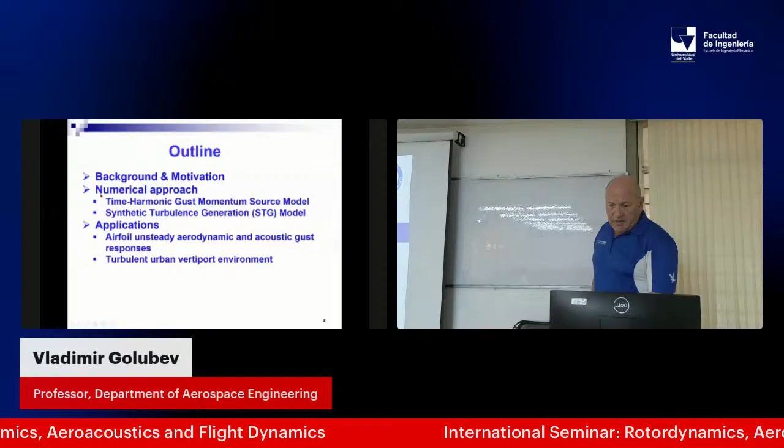So we'll talk about some applications, and first start with the formulation and motivations. We developed what's called the momentum source model.

I did all this back in 2006-07, which was the first attempt to do this for a single time harmonic.

Then in 2011, there was the first paper on the extension of this single gust to the entire turbulence, because turbulence is basically a spectrum of energy composed of modes. Each mode is basically a time harmonic gust. You assemble them in a special way to represent a specific spectrum.

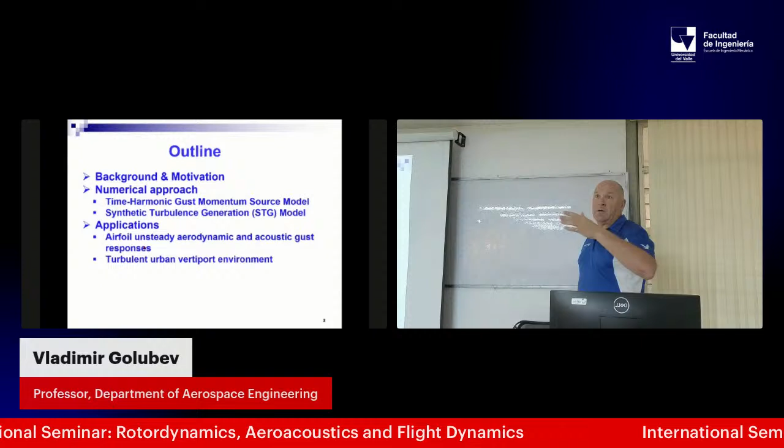Like for instance, in the atmosphere, when you look at turbulence, like in the clouds, that would typically follow some von Kármán spectrum - a specific type of energy spectrum where all the modes are distributed in a special way.

If you do turbulence in rotor-stator interactions in turbomachinery, like for instance a turbojet engine, that probably would be most useful - it would be like the Liepmann spectrum. In some other cases, the easiest one is Gaussian.

It's the easiest one because it's actually very easy to model those things. The other ones require a bit of tweaks.

This modeling process also involves some other steps which I'll talk about, broadly called random flow generation, RFG - because there's a lot of statistical data, a lot of stochastic processes involved. You will see a lot of tensors and other things like that. So that will be the challenge.

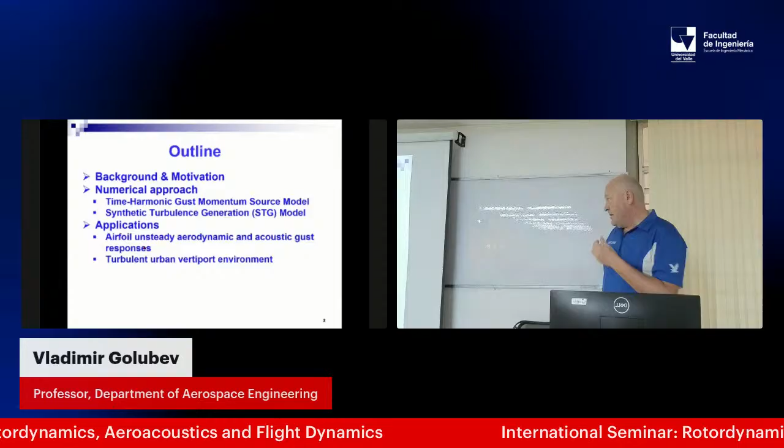But anyway, that's what it takes. Then we'll talk about applications. One application is what historically was unsteady aerodynamics and acoustics of gust responses for airfoils, wings, etc.

More recently, it's what we're doing with NASA - turbulent urban vertiport environments. That's a classical example where we apply the same methodology I developed 20, 15 years ago, to this new kind of application: eVTOLs, future air taxis.

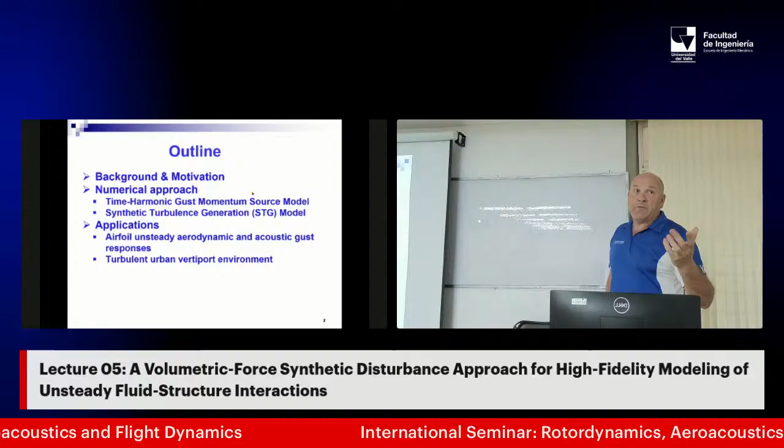So it's all basically for simulations - a methodology for high-fidelity simulations, implemented in several CFD codes, including OpenFOAM. It's now part of this, I think it's also part of GitHub, so you probably can get it from there as well.

Ask the students. Historically, again...

The urgent need for this type of source in CFD simulations came from our analysis for micro vehicles. That was part of the Air Force work which I started in 2005. We were very much interested in developing these micro vehicles and the need to analyze what the dynamics of these micro vehicles would be.

We would go to the Air Force Research Lab, and in every poll there would be displays everywhere showing this future. Just a scary future, right? So you cannot go anywhere. Everything you see, like a bird sitting on a branch, it's actually a micro vehicle, because they look exactly like that. The whole idea was to put them exactly looking like small birds, but they'll not just be watching - it actually can have a weapon inside.

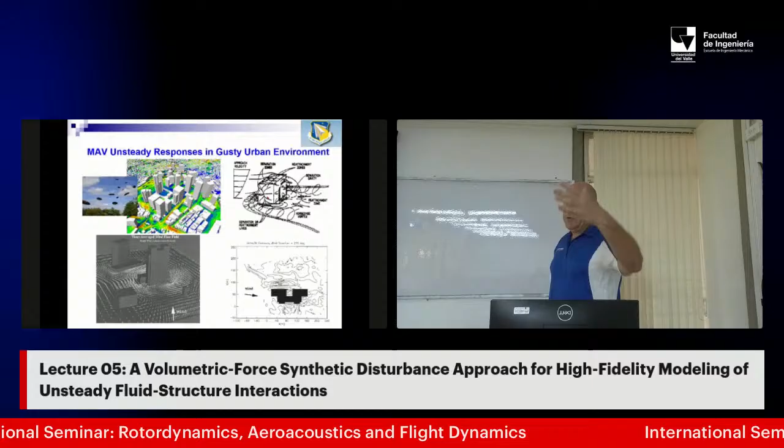A lot of research has been done on this kind of gust environment, particularly. I mentioned before, I think in Japan there was a lot of research done. They did a lot of experiments on so-called prism flows - they'll put in the wind tunnel a prism, some kind of brick, and put the flow around it, and measure all these structures which appear: cavity zone, separation zone, rotation zone, horseshoe vortices, all kinds of things.

Actually, that was historically the project which brought about this whole subject of rapid distortion theory, which I was mentioning - how the gust gets distorted due to mean flow variation, because the original work was done by the famous professor Julian Hunt, Sir Julian Hunt, from Imperial College in London. I met him - he's a very peculiar, interesting person. Talking to him is probably maybe the same as talking to Einstein or something. He's one of those geniuses - you just see it right away.

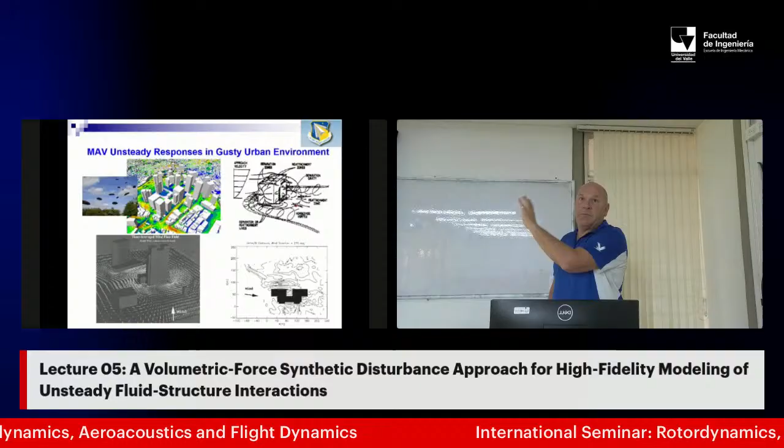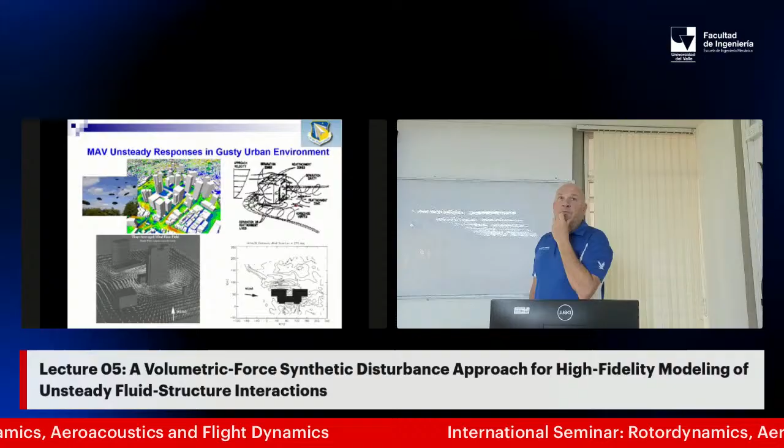Anyway, so he developed this whole theory for this kind of flows - that was the whole idea about buildings and everything. It appeared in the Journal of Industrial Aerodynamics, Wind Engineering and Industrial Aerodynamics - that's one of those journals, if you have a subscription, you have to look up, because a lot of things I'm talking about showed up there. We call it the Wind Engineering Journal. It's usually important for civil engineering, because they talk about loads on buildings due to winds, on bridges or any kind of structures. That's an important journal for them, but of course we like aerodynamics as well - so it's one of those areas where aerospace engineering and civil engineering intersect very clearly.

So for us to analyze those kinds of effects on structures like blades or wings, we usually decompose those things into canonical forms. One idea - what I was doing - you can decompose the structures into forms like time harmonic gust, sharp edge gust, Taylor vortex, particular turbulence things, etc. These are canonical forms, because later we can analyze them separately. For instance, if you decompose, I can understand what happens for the gust interaction at particular frequencies, including with that kind of decomposition with the structure, with the blade, etc. That's much easier - otherwise there would be no control. You want to create a controlled way to analyze things. That's what we actually do in NASA research - I was proposing from the beginning we need to decompose the flow fields into canonical forms, study the response to each, then assemble them back. That's the more coherent way to do this.

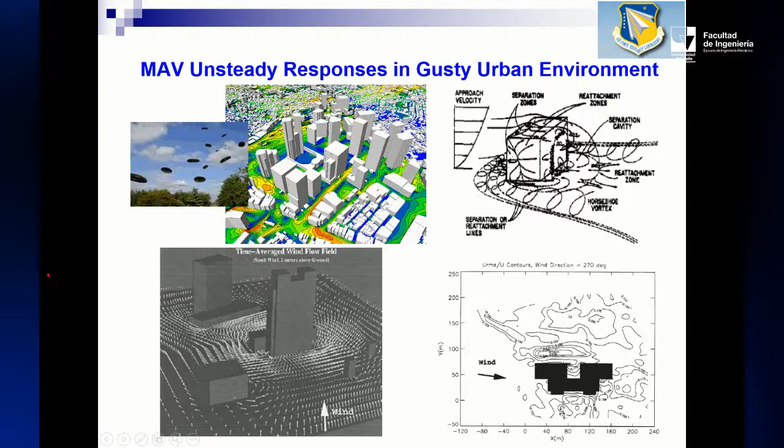And that's again an example which we were doing for this type of buildings. That's what Ali Reza, my student, is doing - going to be modeling, and I've talked about this briefly before, but I'll talk more about this thing later with this particular problem. So there's a lot of things happening here at the rooftop, and that's where these things will be landing, taking off from.

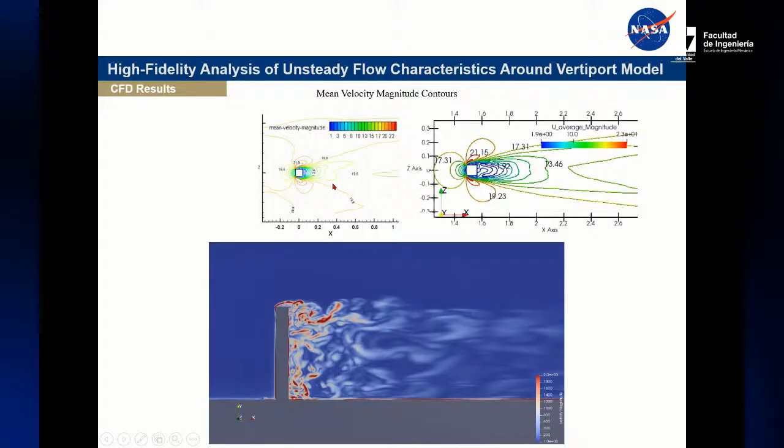Anyways, so you can pretty much build the structures using SPOD, cross-spectral decomposition. I can do FFT as well. So I'll have another presentation tomorrow where I'll talk about two various approaches. They actually should produce more or less similar results, but the SPOD sometimes is much more expensive to do these sorts of cases. So anyway, running LES CFD simulation and proceeding with the SPOD, we can look at those structures which appear in different parts of the flow around the buildings.

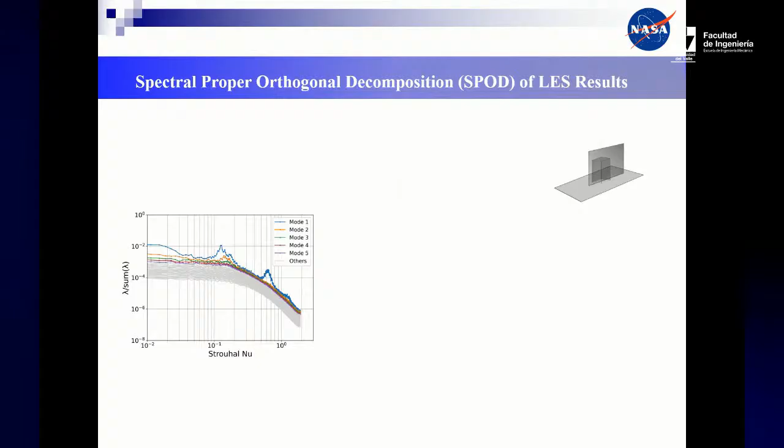And for instance, we can associate one particular spectrum with one particular structure here - should be one vortex shedding, another structure somewhere further downstream. And then this guy will get shaded with this shedding, which we'll call Kelvin-Helmholtz instability, which is due to the separation at the edge of the building. Which again produces this Kelvin-Helmholtz instability, and that shows up in terms of the structure, which is pretty much time harmonic gust. So that has specific frequencies, you can see.

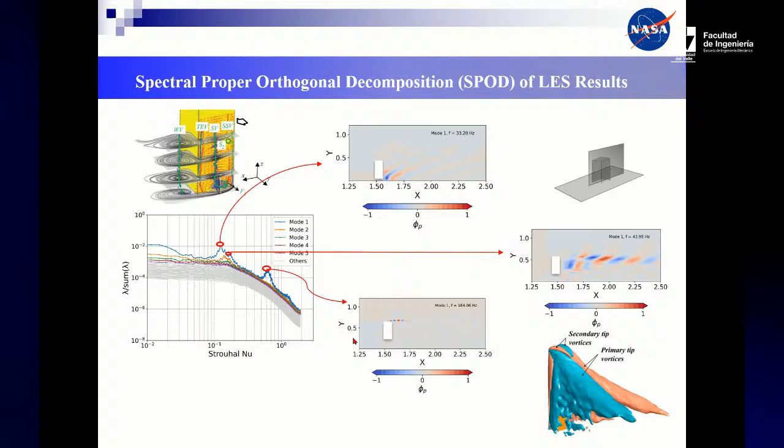That's what can fold right into the model for our analysis. So this is the decomposition which we basically followed.

So there will be another lecture tomorrow, I think, on the SD7003 airfoil, dealing with canonical forms. So that will be the focus of this thing later, for micro vehicle research specifically. But this thing is actually just to talk about how it goes.

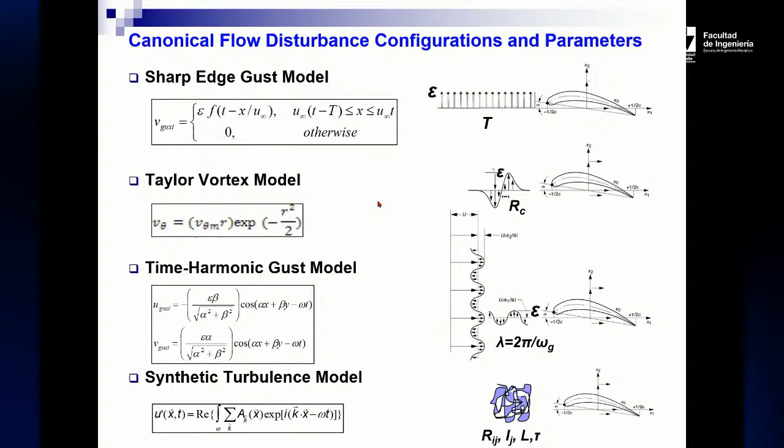So we have the sharp edge gust model. There's a Taylor vortex model. There's a time harmonic gust model. Synthetic turbulence model. So those things are the structures which we sort of can predict response to. In fact, that brings us to the problem where we can actually train the data based on the position. So we know already how we should react to each of those models. We can assemble for anything in the end very quickly. So in the future that will probably be a machine learning thing, which is useful for autopilots to react.

Okay, so this is a paper. Historically, it was one of the first in 2006. I think that's where the whole model appeared first. 2006, 20 years.

So this is the classical time harmonic gust, two-dimensional in this case. Usually it has what they call the transverse gust, which is normal to the chord, or like two-directional flight. Then you have the chordwise - you see the variation in this chordwise direction, which usually produces much of the effect on the boundary dynamics. For transverse gust it's most important - that's basically the induced angle of attack, so that's a direct link to the unsteady loading. This gust is more like dynamics of the boundary, so it has like an indirect effect.

And then there's another component which is not shown here on the board, which is called the spanwise component. So that all produces what's called oblique gust. Now, oblique gust, like spanwise, is not shown here at all. We're not talking about this until - well, we'll talk about this, because that will be the work of Marina, our PhD student, and Peter, another Russian student. She was doing her PhD on that three-dimensional case, and I'll show you some of her results there. But this is a classical two-dimensional time harmonic gust, and that's what we implement for a variety of different studies.

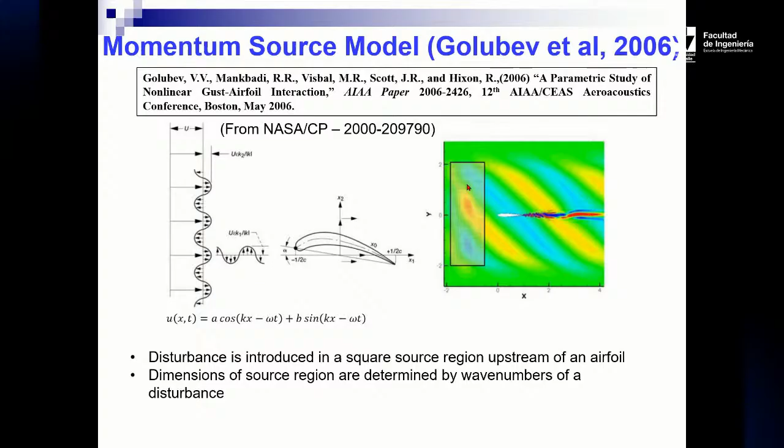So this magic is some particular analytical work which was done using complex functions. Cannot do it otherwise. With the complex analysis, you can generate the specific form of function which will produce a source for the momentum, which will generate a particular gust of that particular amplitude, frequency, etc. And then the turbulence - it's the same, because for the turbulence, you just put them all together, different gusts, in a very special manner.

So I'll talk about this. A legacy of this work comes from NASA, which used to arrange the famous CAA - Computational Aeroacoustics Workshop. There were about 4 of them over different years, in 2000, 2004, and I think another in '96. The Gust airfoil problem is what's called a Category 2 benchmark problem. NASA would put out benchmark problems like this - there were many, like 6 different categories, and within each category there's something else. So there were many problems, and they would set them as benchmarks.

The way they operate is they announce the workshop, and people try it with their own code - that was all about code development. You develop your code using different methodologies, they give you the benchmark, you run it, produce a solution, and submit. Then judgment day comes at the workshop, because there's a secret solution that nobody knows. All the different teams prepare solutions, send them in, and then people come and learn how miserable they are.

That's actually why they probably stopped doing it - after 4 workshops people were so affected, maybe somebody committed suicide or something, I'm not sure, but you can imagine coming and your solution is just miserable compared to the real one. So your code is just bad. They put everything up showing here's this guy, here's that guy. By the way, DLR was always one of the best - them and NASA usually produced one of the best solutions. We also had pretty good results.

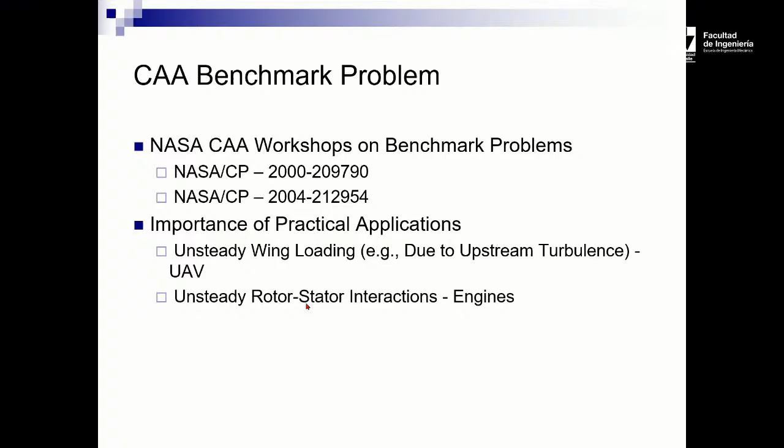So everywhere the gust problem is really important. That's one big thing, because in practical applications for jet engines, it's all about modeling the wakes behind the rotor interacting with the downstream stator, or fan wake interacting with the struts. That's what produces 60% or 70% of all noise. So that's a big thing, that's what people model.

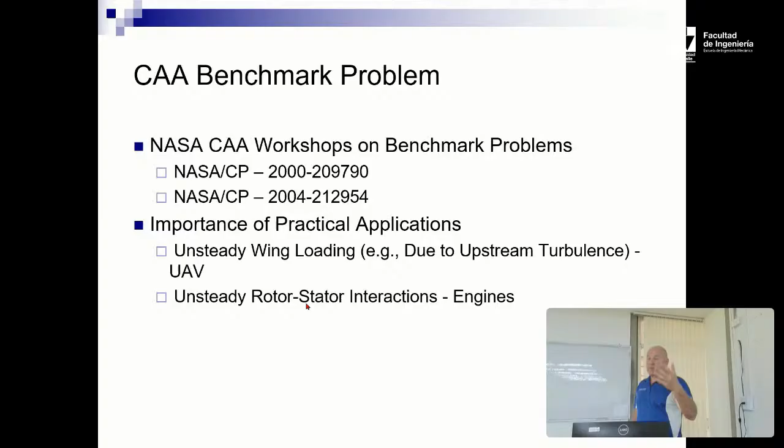And the gust-airfoil problem is the most baseline benchmark problem, where everyone is just trying to compare against. So some legacy of this work, for the high intensity gust-airfoil interaction, was Morse and Ingard. You can find this is like classical self-interaction and exchange of energy, generation of higher harmonics.

I did a lot of work on the high intensity gust, but its amplitude was really high. You have a lot of distortion in the results because the high amplitude gust triggered instabilities in the viscous wake, and then we did a lot of studies in 2001. That's when I started my work, more or less, at the beginning of my career as a professor - that was pretty much the work I was doing for like 5 years.

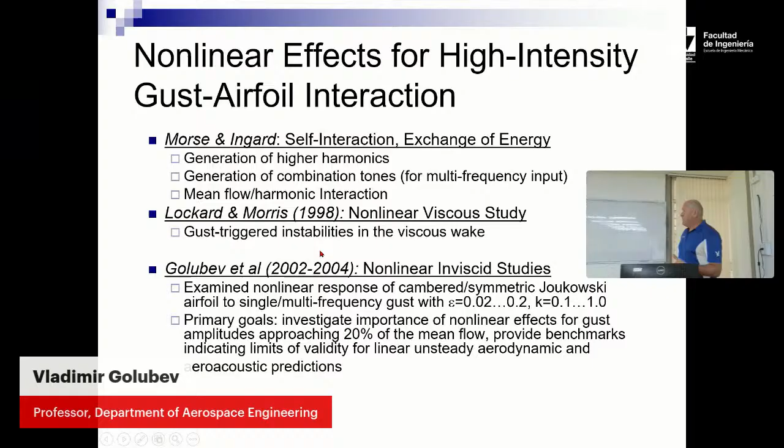And then I went to the Air Force in 2005, that was kind of continued. But originally this was the work with NASA, because NASA was giving us money from a special fund from chief scientists at NASA to do the studies, and that's what we did.

So you see this diagram - directivity diagram, switching directivity for the airfoil gust interaction, typically dipole. If you remember last time I was talking about the Ffowcs Williams-Hawkings methodology for acoustics, which is basically a solution of the field equations, acoustic analogy equations, convective wave equation. Basically you have the monopole, quadrupole, and dipole as results in the far field - that's what you usually measure in terms of acoustics, one of those three.

Monopole is usually produced by thickness displacement by the airfoils or blades, etc. The quadrupole is all turbulent stuff, wakes, etc. And then the biggest one is usually dipole - that's produced by unsteady loading of any sort. Anything with unsteady loading, that's what gust produces.

It produces unsteady loading because it has variation of the angle of attack. So the angle of attack is varying, producing unsteady loading by variation. And then when you change the amplitude of this gust, you can see the distortion of this dipole pattern. That was my work in 2002, 2003.

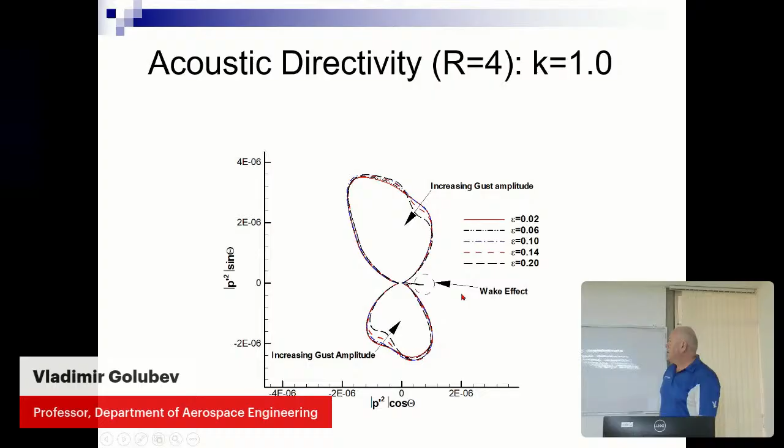So at that time, I was looking at how do you impose the gust in CFD. We originally were working with the BASS code, which is the NASA code, developed by my friend Ray Hixon, who actually works as a professor part-time at the University of Toledo in Ohio. And then there's also NASA Glenn, which is also in Ohio, Cleveland. So he was going back and forth, probably an hour and a half every day - it was a distance. So he developed this code.

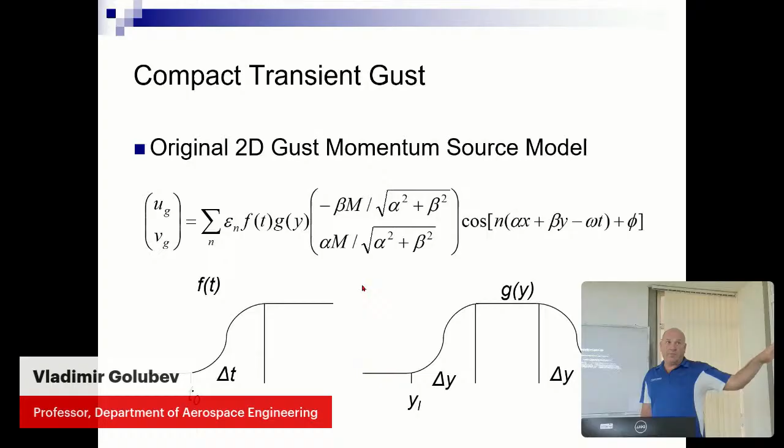This is like one of the genius guys, completely, because he would wake up at 4 o'clock just to go to his garage and work on the code. He was developing this NASA code called BASS, which is like a flagship code for NASA, particularly for rotor-stator interactions. It's called broadband something simulator, I forgot exactly what the abbreviation means. But the bottom line, that was his one code.

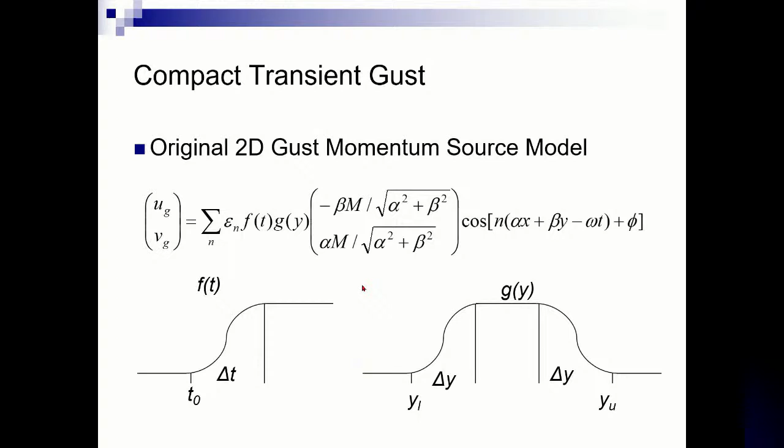Then he was working on another code, which is 4-dimensional CFD. It's time-space CFD, like Einstein's theory applied to CFD. He was developing this in his spare time, so he started his company, thinking he would sell this code. I don't think it happened. But he was spending hours and hours every day, for years and years, to develop all these codes.

At some point I remember there was a story. The code originally was written in Fortran. Fortran is pretty old, right? Most research codes are written in Fortran, believe it or not. There's still versions of Fortran which have been updated every year, so people still use them. Don't think it's ancient just because you use Fortran. Of course, a lot of people moved to C++ later on, so C++ was really a big thing.

So at some point he decided, okay, I've heard so much about C++, let me take the time to rewrite the entire code with tens of thousands of lines, rewrite the whole thing into C++ from Fortran. It took him a year to rewrite the code, and then he ran the benchmark and found C++ is worse, that the original Fortran was better. That was actually quite a surprise.

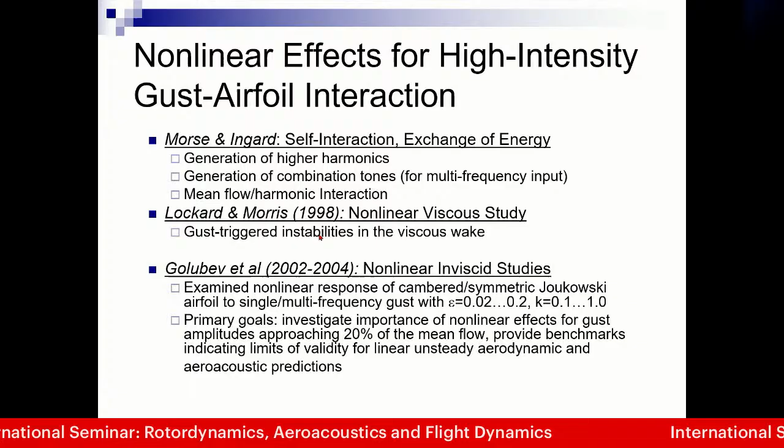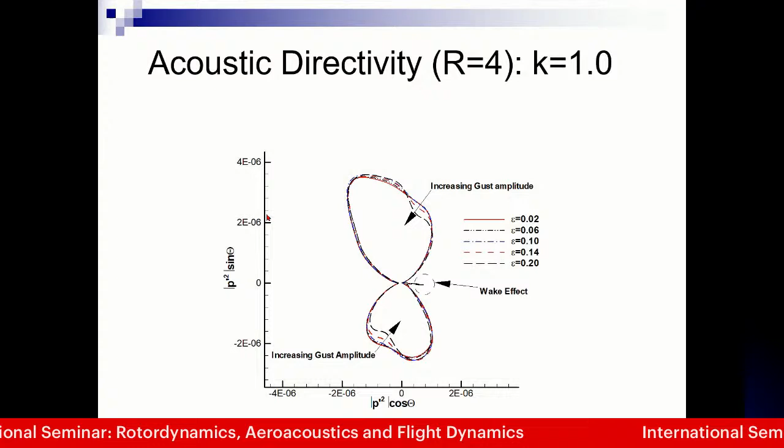Anyway, they're from the same generation, very distinguished. So Lockard was the first one, when he was a student of Morris, and developed a 1D gust - a complex functional analysis. And I did it for 2D, then extended to 3D, and then extended to full turbulence.

So that's how it looks like. This is a magic thing right there. Don't know what to say about it. Just magic.

Anyway, there's many pages of formulas. You have to get to this formula through many pages of analytical derivation using complex functions. But eventually, that's how it looks like in the end.

It's almost like E equals MC squared, right? Almost as simple as Einstein. Almost - nothing is as simple as Einstein in CFD or aerospace engineering. Although you can say the Joukowsky formula is almost Einstein: lift equals rho V gamma. That's it, very simple, almost equal to MC squared.

Anyways, is everyone familiar here with the Joukowsky formula? No? You don't know the Joukowsky formula? How many of you know it - the lift formula? Only two guys know how to predict lift. That's the lift formula for any kind of aircraft: lift equals rho V gamma. That's it, very, very simple.

I was teaching aerodynamics for many years, steady aerodynamics, a lot of aerodynamics courses, apart from jet propulsion, advanced jet propulsion, and CFD - everything in propulsion and aerodynamics. So yeah, you should know the Joukowsky formula.

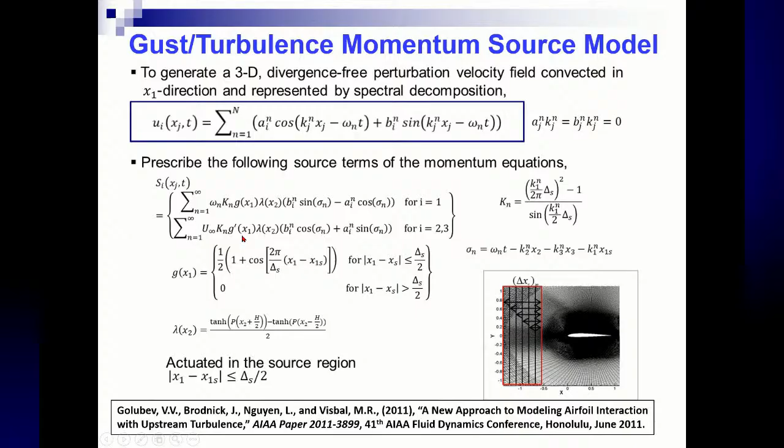Remember, the classical problem is a single 1D transverse gust - that's a component which is vertical to the chord, which produces the upwash on the airfoil. That's called the Sears problem, because there's an analytical solution - the Sears solution, as a function for that. So that's usually the benchmark everyone compares against for the flat plate with the transverse gust. At least you have to compare with that result because it's analytical, in this case for the flat plate.

So this is a process where you do a lot of validation. You can generate a momentum source and push this gust so it propagates downstream, like a statistical fluctuation. This is how the function is actually developed to make a smooth transition, so you can avoid pressure wave build-up. There's still some pressure - typically this pressure is hydrodynamic pressure, so it decays very fast.

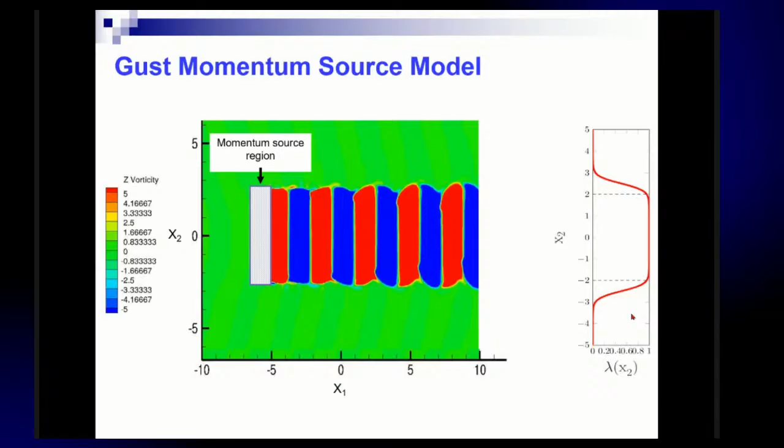There are different types of pressure, by the way. There's acoustic pressure, which propagates to the far field at the speed of sound. And there's hydrodynamic pressure, which is also a potential disturbance field, but it decays very fast - it's called an evanescent wave. So typically you produce hydrodynamic pressure.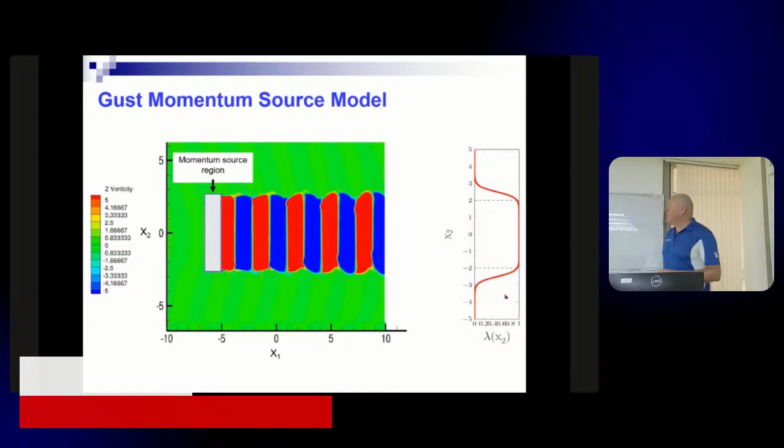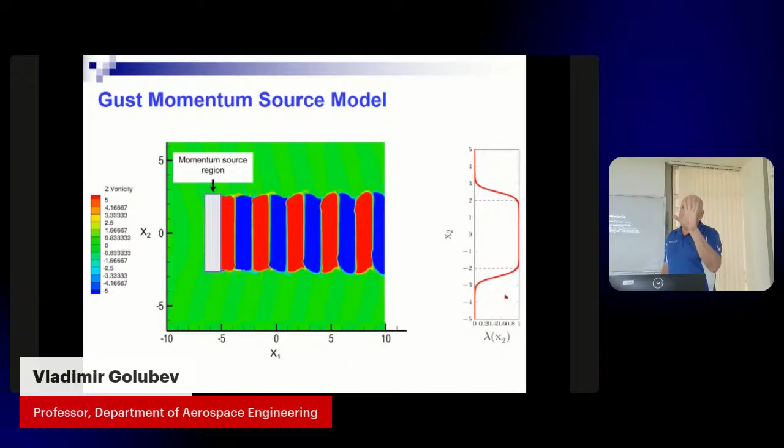It can still corrupt your solution to a low degree, especially near the surface - if you're very close, it will still have an impact. But if you do this kind of smooth transition, the impact will be much less and you almost won't see it. There will be some pressure, but not much - it won't be dominant.

So then for the gust momentum source, you can see in this momentum source you basically superimpose, for instance, 4 different frequencies with wave numbers 0.7, 1, 2, and 3, and they all have these half-widths, right?

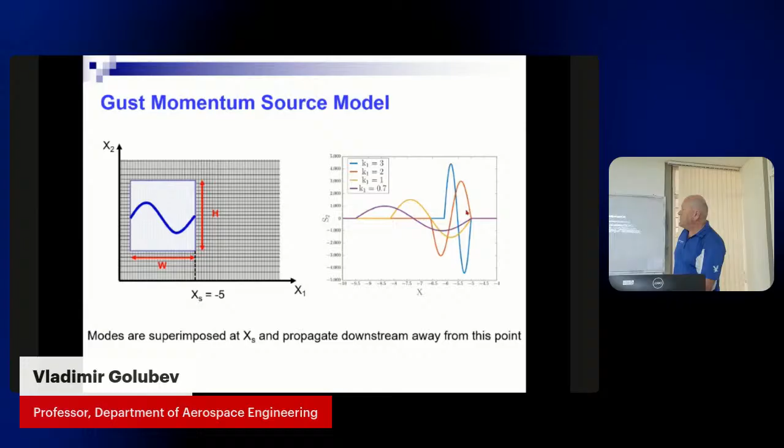Half wavelengths for this source region, and this one, but they overlap, and eventually they all meet at the right end of the domain. So this is an example for the four waves, and now we're just looking into how this behaves in 3D. That's what Marina was doing.

So you have this both in this direction, but also in spanwise direction. Generate this in spanwise as well, so there's wavelengths there. So you can do that, and that's what she was doing. We call it line plots.

So this is the analytical gust. The blue one is what we're trying to impose, and the green one is what we actually generate by this methodology, and you see how they match. That's actually what we do always for the proof, that we actually generate what we want.

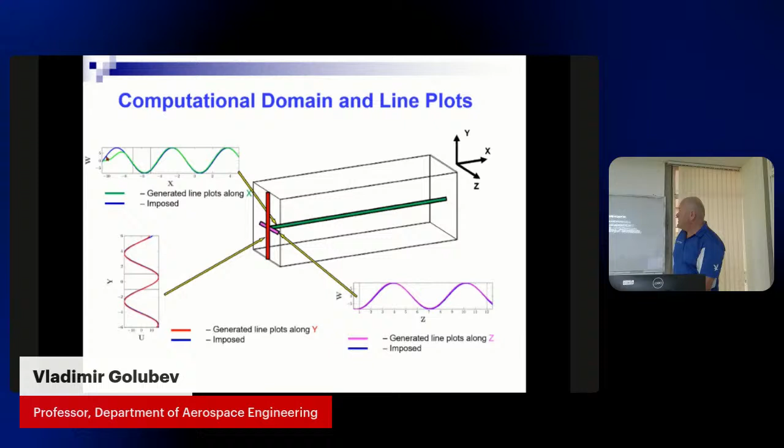Even so, this is what they call - remember I told you about the dispersion relationship - nature imposes a divergence free condition. It means if you generate disturbance fields in two directions, you still will be generating something in the third. Even if you think it's zero, it's never zero. Nothing is zero. It's like trying to push fluid in one direction with a spoon in your cup of tea - you'll immediately generate something in the other direction, even if you don't want to.

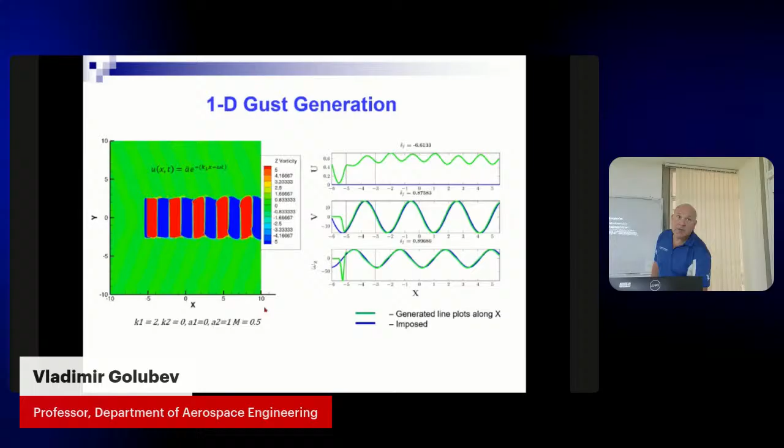So these are the disturbances created with k1 = 2, k2 = 0, a1 = 0, a2 = 1, and Mach 0.5. So there's a one-dimensional disturbance in the Mach 0.5 flow, which is convecting this whole thing.

2D gust generation, some range, and again, this A dot K should be zero - that's the divergence free relationship, that's what it imposes. They cannot just arbitrarily take those things. You have to make them clear that they should satisfy divergence free conditions, so you have to select properly, otherwise they will just violate nature. Something else will appear, not what you expect.

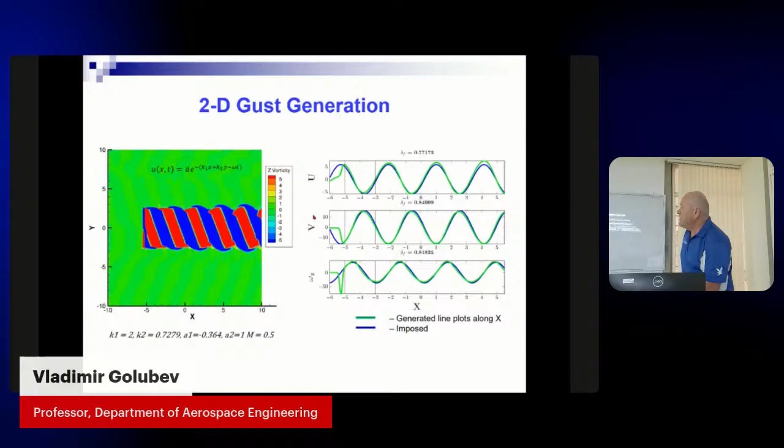So this is actually the example when you have the full free field - 2D gust sitting there. All right.

Now, all this preliminary work was done on that code which we talked about - this is the flagship Air Force code, developed by this guy Gaitonde originally back in the 90s. A lot of work has been done on that. I can share materials on these things because I have a lot of videos that you can share. This is a solver for compressible unsteady Navier-Stokes equations, with strong conservative form, sixth order compact scheme, and second order implicit time marching - robust implicit simulation, efficient moving, parallel, everything.

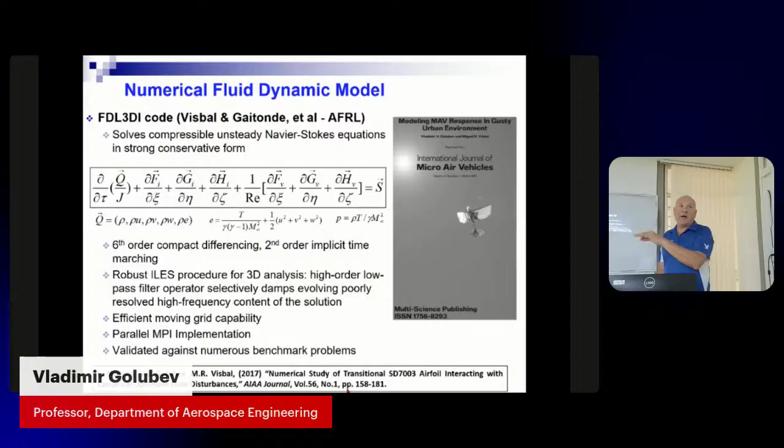So we published a paper which I'll be talking about tomorrow - remember the SD7003 airfoil interacting with canonical abstract disturbance. It'll be a whole presentation just about this topic, because it's basically implementation of this specifically for the micro air vehicle research. But in general, in this paper, we'll also take a look at things including the momentum source for the gusts.

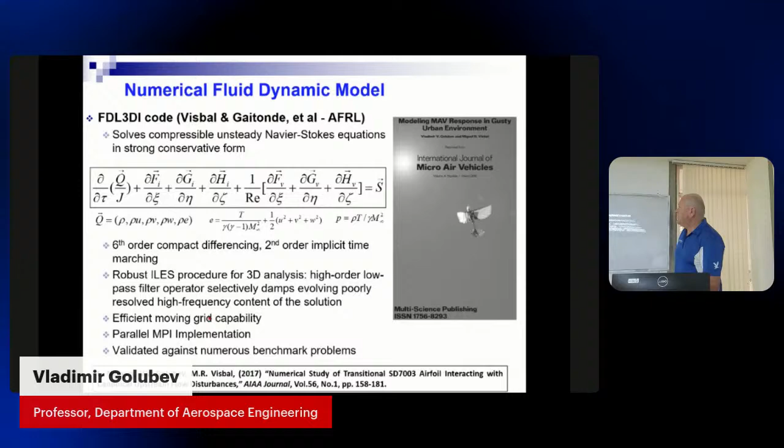That was in a journal, available journal. It's actually one of the longest papers - very complete, really thick and long. I don't know how many pages there - a lot of things there. So this is the stuff which I'll be talking about primarily tomorrow.

So this is actually for the turbulence with intensity of 0.7% of 35. Length scale, characteristic length scale here, number of modes which we use, and the specific duration.

Now, the same program was formulated for the gust, with the time harmonic gust, the sharp edge gust, with the vortex, but that's a separate story. I'll talk about this later.

If you look at the time harmonic gust single mode of turbulence, you see that actually propagates. This is opposing here in the source. It goes through the whole wing section, right? And then it basically wipes through the boundary layer with the frequency of the gust. So this periodic wiping of the boundary layer, you can see this whole process that passes through. You don't see the gust, you see these vortical structures of the boundary layer. You can see that due to this interaction, this is the process. So this is LES simulation.

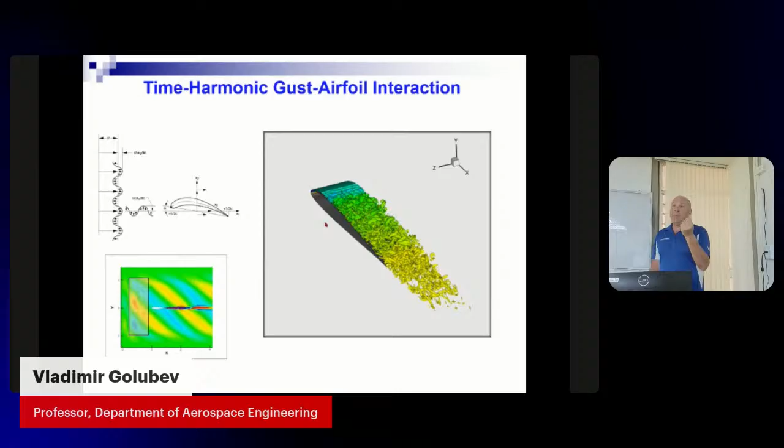So you have to make an extension, usually 0.1 or 0.2 chord in the Z direction. So this is actually probably what 0.2 gives. So you can allow the turbulent structures to appear, and that's a necessity. You cannot do this. You could do it in RANS because you don't care. Then you can do 2D, but nothing will be resolved. Don't do this.

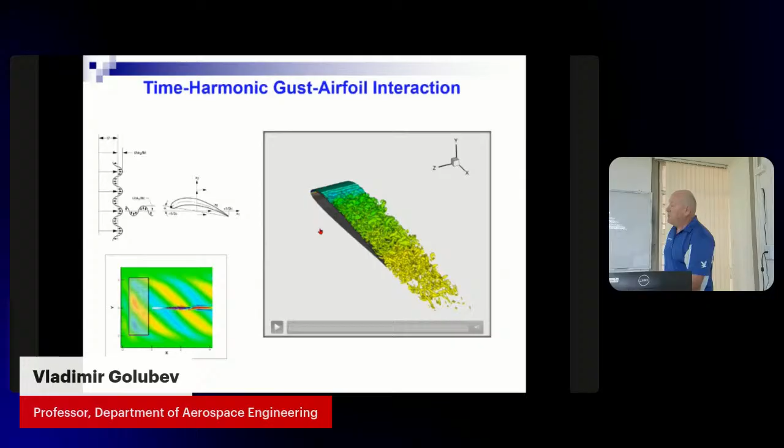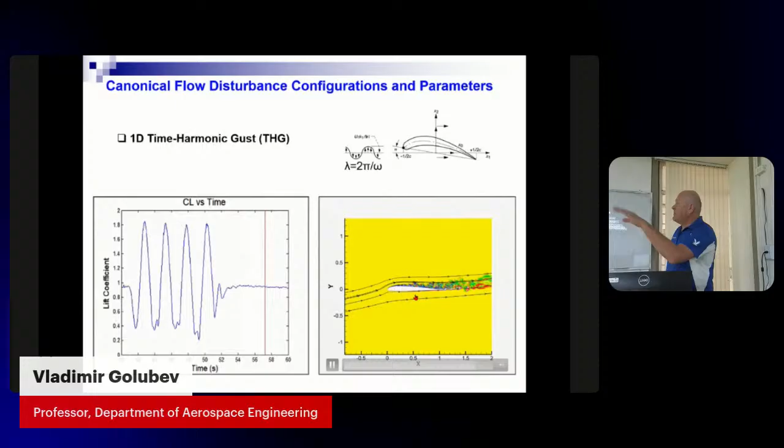But if you want to resolve the real structure in the boundary layer, you have to do 3D. So this is an example of 1D time harmonic gust like this. You see that was the process. Again, I'll talk about this more in detail. When they interact, it has a duration of so many seconds, and it goes through, and it produces this effect where you see this gust boom starting to appear. There's a lot of dynamics here.

So of course, again, I'll talk about this tomorrow as well. So it's all MAV research, micro air vehicle. They were interested if something small, at small Reynolds number, happens—you have the gust, like something in the air hitting this thing. What will be the effect on the aerodynamics?

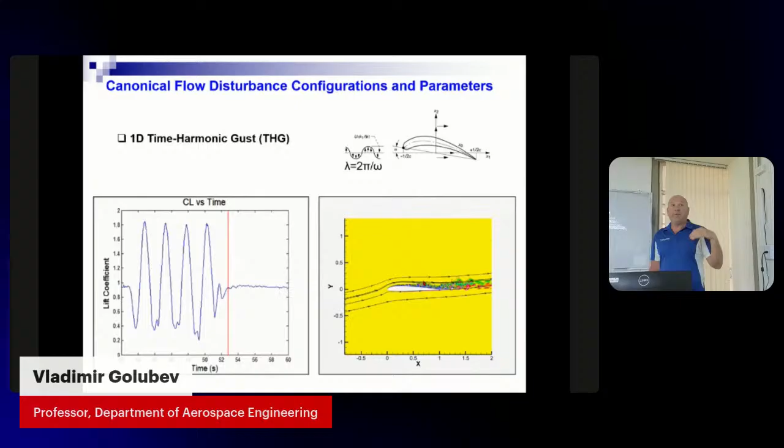How much it will be responding in terms of lift, drag, moments, and particularly important, how quickly it goes back to normal after the gust passes through. So the relaxation time was really important. But I'll talk about this more much later.

We'll also talk about this problem, because if you go from 1D to 2D, that's where you have to use what's called—as I mentioned—the unsteady two-dimensional, second order airfoil theory by Atassi and Goldstein. I'll talk about this tomorrow. So that's going to get more complicated.

This is actually the correction to the steady state solution, which is a Sears solution. You got this interaction with the gust, that's how it behaves—it's called the Sears spiral. It's something like this, and it's a complex function, in the complex plane. Lift is complex because S is a Sears function, but it's a complex function. So it takes care of amplitude and phase at the same time, because it's all about phase shifts in the solution.

And when you go to 2D, then you have to account for this distortion. You see, this is more or less straight—this is actually a very distorted front. And that's rapid distortion theory, which accounts for those effects as part of this theory. I'll talk about this tomorrow. I'll just give you a preview—just keep in mind that's very important.

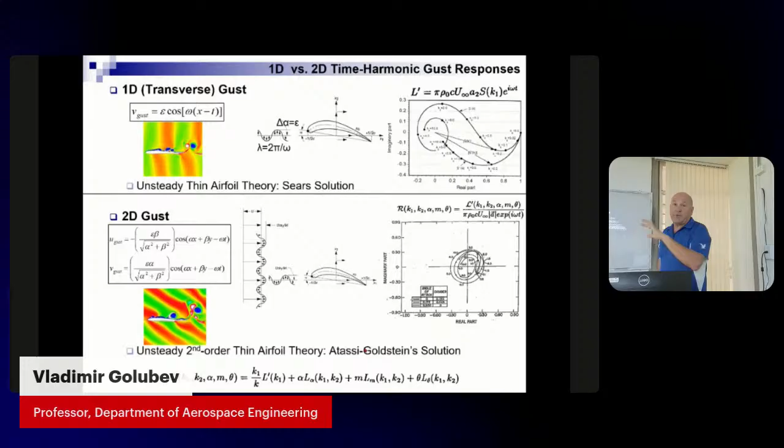You can account for the effect of camber, thickness, angle of attack. The original Sears result is all for the flat plate trigger—like no angle, no nothing. And that's a classical Sears solution: flat plate interacting with a single 1D transverse gust. Everything else beyond that we call these kinds of corrections. And this correction is explained by this theory by Goldstein and Atassi, back in '79, I think.

He published this paper in JFM. This paper is actually called an IQ test for engineers. Really, I mean, try to understand it.

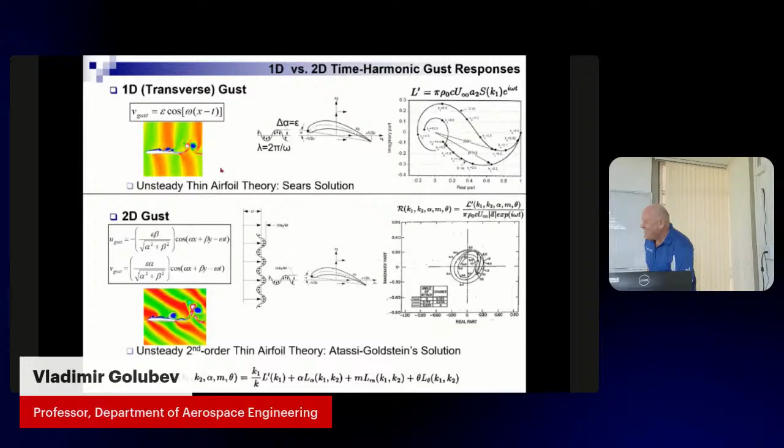Usually that's why people probably like dropping the whole profession because that was just crazy. You can look at the paper because I keep it just to refresh your mind, keep your mind sharp. Oh my god, okay, this is really crazy, man, crazy. Probably one of the craziest you can imagine.

Anyways, so now we're moving to 3D. 3D is what will be interesting because it's actually the extension with Marina Kazarian. That's about 3D effects because they have forward turbulence and forward directional response. So that was published in 2019 in San Diego first, extended in 2020.

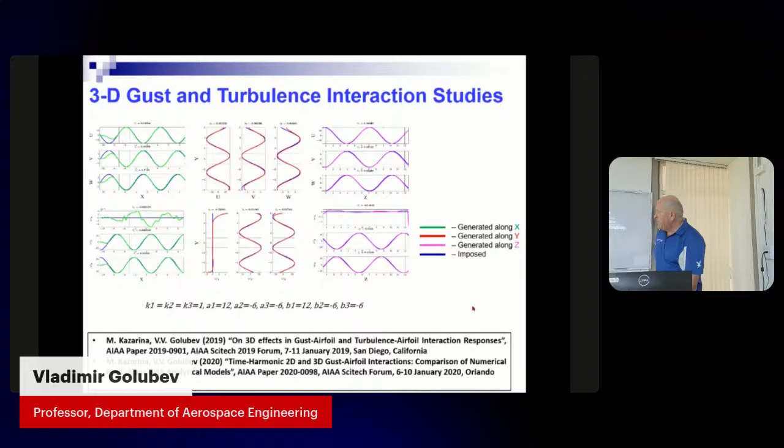Numerical procedures - oh, actually by the way, she cannot run FDL3DI. She was a Russian citizen, right? So you would have to use something else. At that time, Peter, her husband, was doing OpenFOAM. It was too much, she said no. She was doing Fluent, which is also possible to do, easier for sure.

Because it's actually very user friendly - do you use Fluent? Yeah, okay, so you can always get tutorials, you can get support. With OpenFOAM, you're pretty much on your own. Yeah, then that's the thing - there are people who actually can provide a service for you for money to explain what's going on.

For instance, at Notre Dame there's a professor, forgot his name, originally from Serbia I remember studying. But his part-time job, he is a consultant for OpenFOAM. So people trying to do something, they call him - I don't know what's going on here, and he actually helps. He's an expert, complete expert. So sometimes it requires expertise.

You have some forums, of course, right? In the forums you can probably ask questions, but who knows when they respond, and who knows who will respond. Isn't that annoying?

Anyway, so you see the progression - for 2D Zhukovsky, we had like 30,000 cells. For 3D NACA 0001 for the gusts it was 1.5 million. Then 3D turbulence was 25 million. You really have to compress, have more grids because you have to put a lot more modes, like 100 to 200 modes, which requires a lot more to resolve those frequencies.

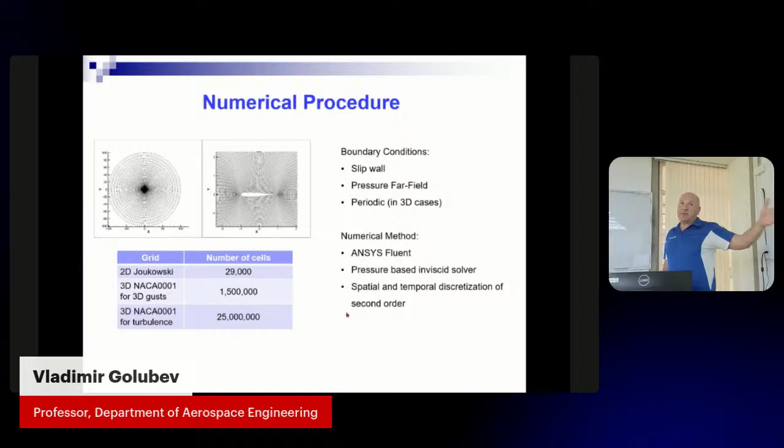So you go into the high frequency content spectrum - usually it's a von Kármán spectrum or something like that, but you have to involve high frequency. The higher the frequency you have to involve, the more grid points you need to resolve it, because typically, even with 6th-order time differencing, 6th-order compact scheme, you need at least maybe 10 grid points per wavelength to resolve it.

Something like that. If you run something with OpenFOAM, which is like 2nd order at best, it's like 25, 30 - so you'd need like 3 times more mesh to run OpenFOAM than this code, FDL3DI, because it's 6th-order accurate. So you need fewer points, but still a lot - 25 million, okay, well, a lot.

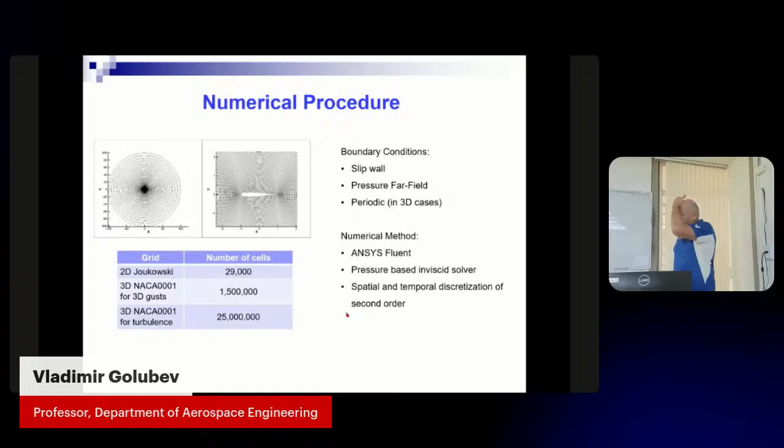You know how much for the rotor we're running? Routinely, it's 100 million, or maybe even more than 500 million. So that requires all NASA computer systems, and you run it for like months. So that's great, I mean, yeah, it's a different scale of the problem.

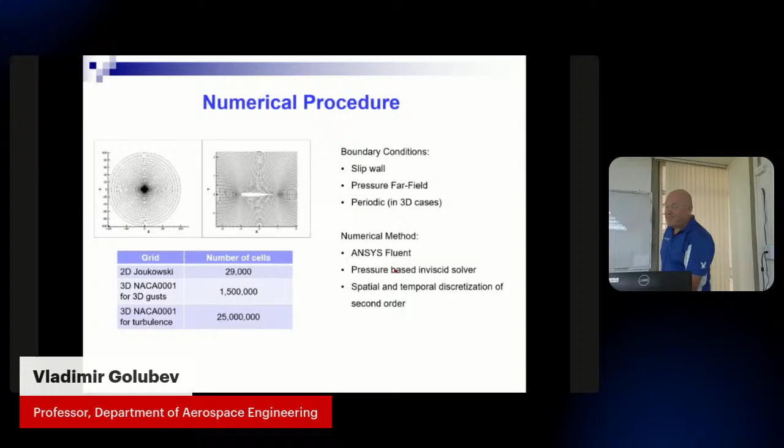So we're looking for a quantum computer. Need to do something about this. So that's what happens, I mean, this is a beautiful problem.

When you do 3D, what's called an oblique gust, this is the wavefront. So you have this thing coming and interacting with a wing, say wing or the blade, right? So it's not just like this, it's interacted at an angle. So you have the component at an angle. Okay, so everything is governed by the convective wave equation, right?

So this is acoustics - acoustics is the convective wave equation. Even in the case when you just forget about any kind of unsteadiness, you get Laplace, right? That's the classical inviscid thing - Laplace equation has to be solved to get your result, even for Joukowsky or something. But if you do acoustics, you always get the time term, which you have to retain, and this time term will bring you to the convective wave equation. So we solve this in the frequency domain - when you do frequency domain, the convective wave equation converts to something called the Helmholtz equation. And this is the Helmholtz equation right there.

This is called the Helmholtz equation. So you solve for phi, which is the velocity potential function. Pressure directly relates to dphi over dt. So once you get phi, you can get the pressure in far field acoustics. That's how the system works.

So if you think about that, if there were no K3, which comes from the 3-dimensional component, there would always be a convective wave equation which produces a real acoustic wave that propagates outside.

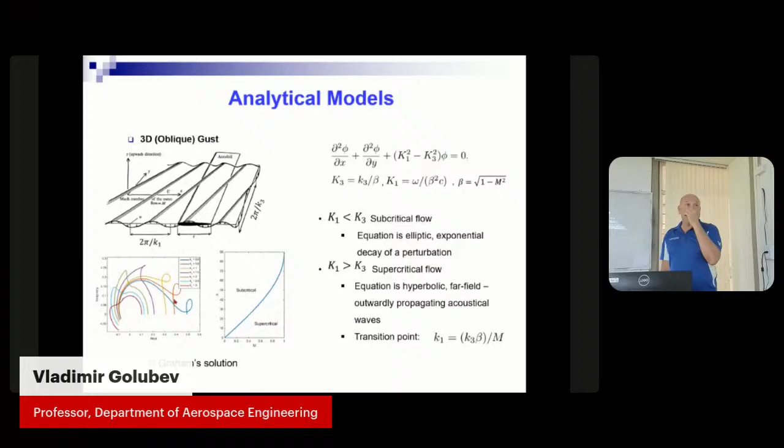And this transition is usually shown—you can run simulations, or you can do the experiment, and you'll find those things. These wiggles come from this transition between supercritical and subcritical regimes. Very interesting phenomenon, small physics, but that's what people show.

There was a guy named Graham who did a lot of analytical analysis of this back in the 70s.

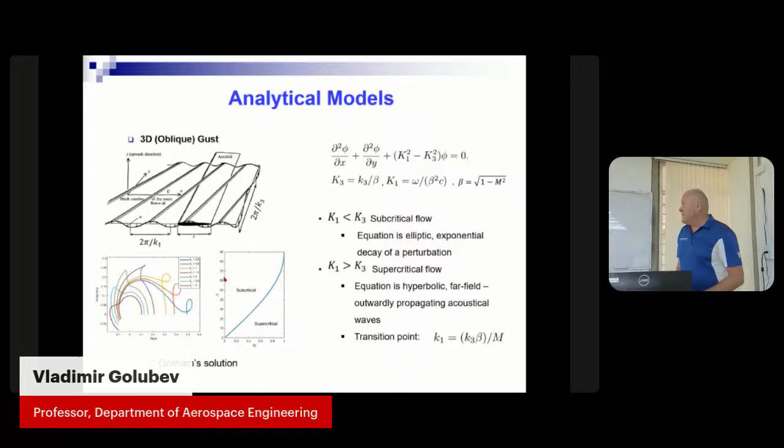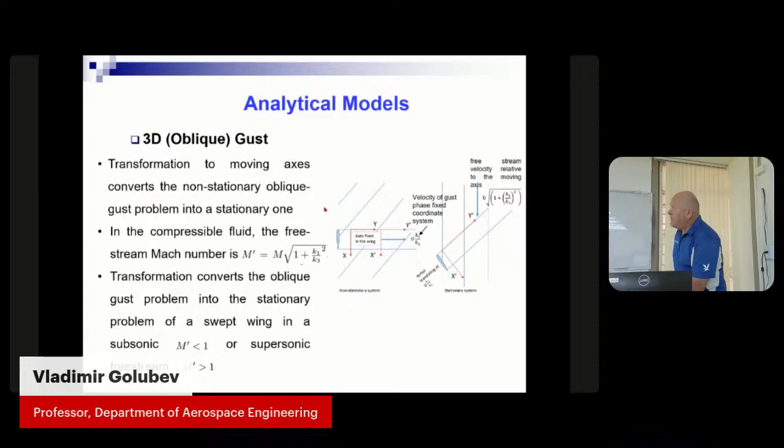Because people were looking at this for a while, wondering what's going on. This guy formulated what they call an analogy, where the propagation depends on the transformation. You can transform the gust into a different frame of reference, like the airflow frame, in which case it's analogous to the propagation of the gas of the swept wing with a Mach number that's supersonic or subsonic. With this transformation, you get to this swept wing problem with a supersonic or subsonic system. That was interesting - that was Graham's idea, and you can fit this kind of thing into that analogy.

So everything is pretty much perfectly fine for these cases, which is pure hyperbolic, right? 1D and 2D gust, always hyperbolic. 3D gust, you see it goes like boom - this change in the lift exactly corresponds to that wiggle in the complex diagram. This is real, but in the complex plane it has this wiggle, and that's what we get.

We actually get a Fluent solution which matches pretty closely. Here's a bit of a different case - I'm not sure what was causing it. I never usually like fluid dynamics results like this, maybe that's the reason, but that's what it is.

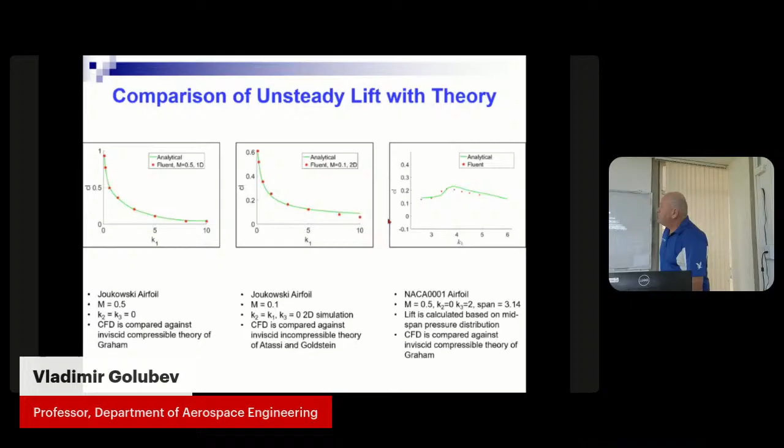We actually confirmed that this process happened in the changing lift calculation. And then there were acoustic contours which she generated for this 3D gust, and this analysis she was running - so this is acoustics now. There was lift, that's aerodynamics. Now for acoustics we look at the directivity, the gap with the dipole - directivity which predicts acoustics in the far field, depending on the situation, and this is all 2D and 1D.

Then we compare against - for the real airfoil, you can't compare with Sears anymore because Sears is always a flat plate. If you want to compare predictions for the real geometry, the best you can get is something called GUST3D. That's the method developed - it's a vortex solver, not quite CFD. Well, you can call it CFD, but it's very simplified and very fast. This solver was developed by Jim Scott, who was a student of Atassi as well, before me - he was also a NASA employee at the same time, working at NASA Glenn.

He developed this code, GUST3D, and that was the code everyone was comparing against for this category 2 problem at the CAA workshop. That was the code supplying the correct solution, so it's very validated. You can see that in most cases we have good results; some cases don't quite match exactly. But this is actually supposed to be a really good match in general, because people are happy when they match within like 3 dB - and 3dB is actually a lot, like double or more. So that's actually pretty good match.

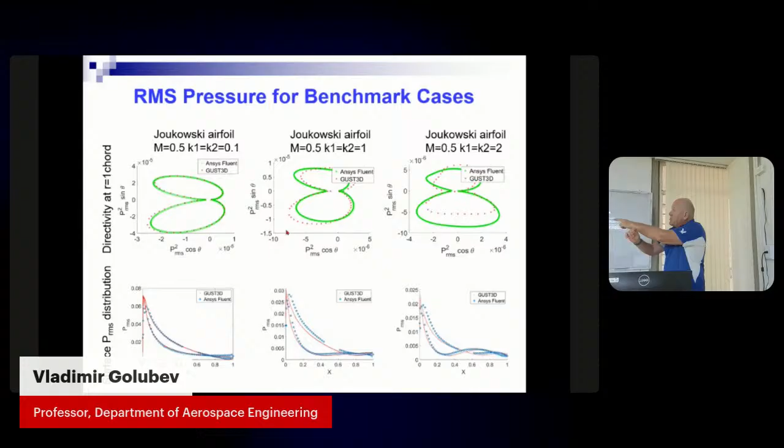So if this is your airfoil and your observer is right there, downstream of the airfoil, you will hear nothing. The effect is zero. But if you're sitting somewhere here, at the same distance away, say 10 chords or 100 chords, but along this line with the airfoil and the gust, you will hear it. If you're in the other position, you'll hear nothing. That's basically what this dipole shows you: the directivity pattern for the acoustic propagation.

And that actually shows the unsteady pressure on the surface, the PRMS, the root mean square for the pressure. That's the typical solution you get, which shows a huge spike near the leading edge, where that's the leading edge and that's the trailing edge. So a huge spike near the leading edge when the gust just hits, and then everything decays towards the trailing edge, which is your Kutta condition, things like that.

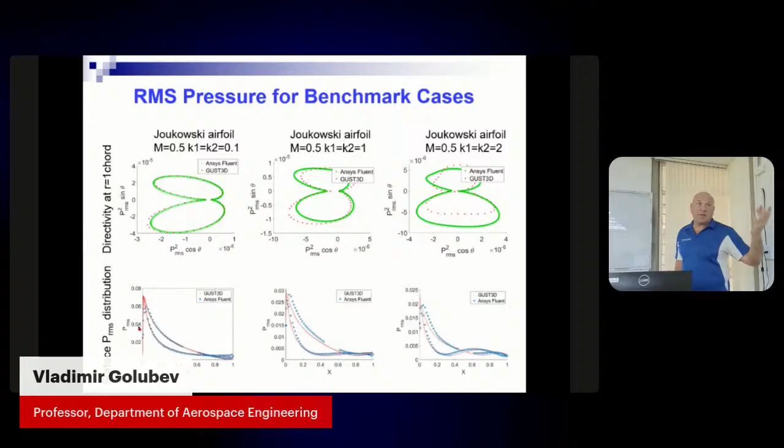Yeah, that's the interpretation of this thing. And then we did the CL for 3D, so we get this gust which has no chord-wise component, but has this direction and this direction. It's like this.

So we model the gust with K1 ranging from 2.6 to 4.9, or even up to 7, and K3 fixed at 2, so the span-wise component is fixed. Then you see what happens: because you fix K3, you cross the subcritical-supercritical boundary as you go through, and this is the lift you get for all the spots. So if your K1 is here, you're here; if your K1 is there, it's there.

That's totally different from what you'd expect from Sears theory for the pure 2-dimensional gust. In a 2-dimensional gust, when you increase K1, your amplitude always goes down, meaning that if you have gust with higher frequency, your lift will go down, and that corresponds to the Sears spiral. The Sears spiral goes like this: the higher the frequency, you go along this line, and the higher the frequency, the smaller the amplitude.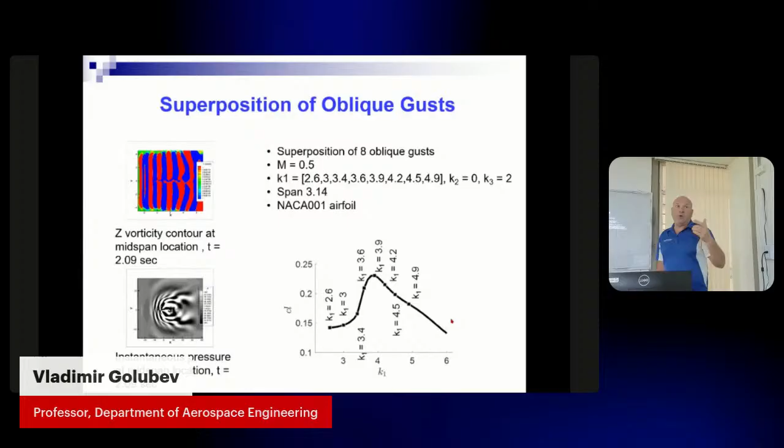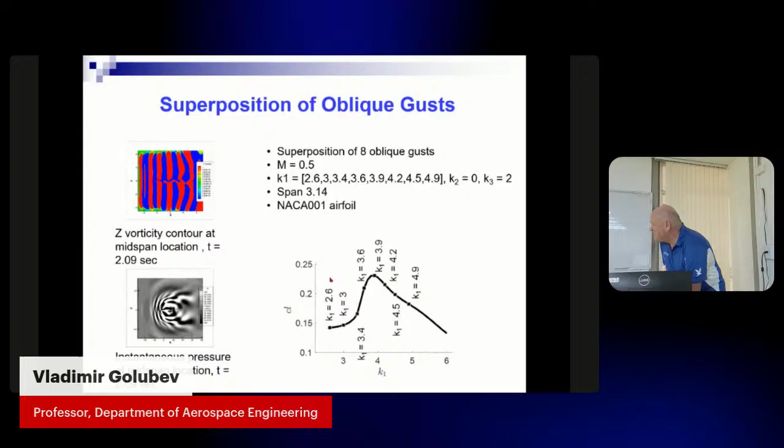I think this is a lot of new things for you guys. Sorry, that's all I'll say. So that's what I do for this.

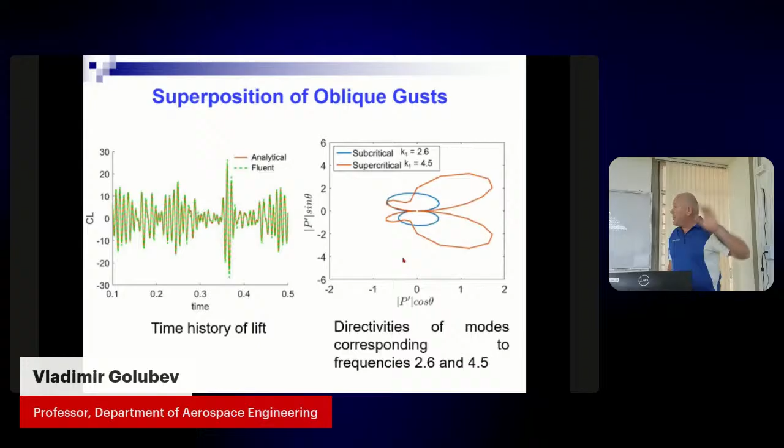Then we started to look at the superposition because we wanted to move to turbulence. We started first with the superposition of several modes to see what the response would be acoustically. You have two modes: one is supercritical, the other subcritical. The supercritical produces this red line, that's the acoustics you get there. The subcritical one is there, but very small because it's a decaying field. You still hear it, but it decays, while the other propagates far away.

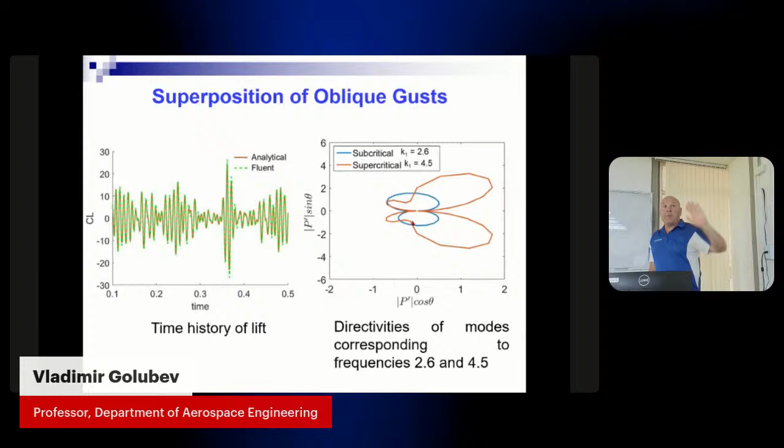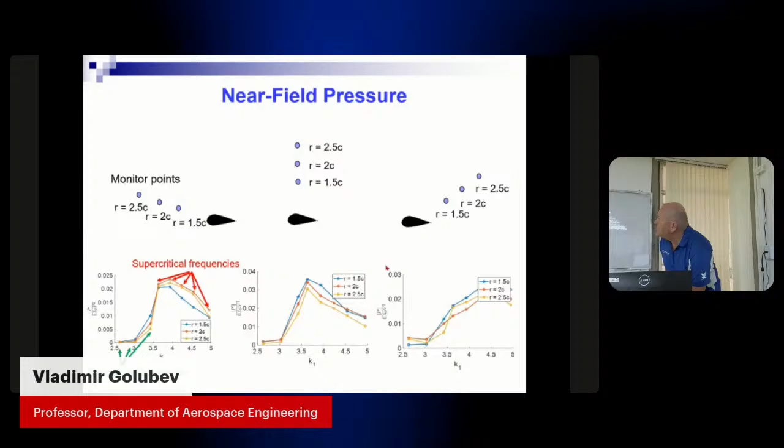Then we get more and more frequencies, and you can see all the supercritical frequencies here, all subcritical frequencies here. That's the pressure in the near field. Eventually, the whole point was to superpose all the modes through the turbulence generation process.

And this process is not straightforward. Sorry, the lecture is already pretty complex, but this is even more so, a different level of complexity altogether. The synthetic turbulence generation procedure, STG, basically employs different methodologies that people have developed, like recycling-rescaling methodology, and classical methods using vorticity, small vortices with different sizes.

We put them all together to generate this. You can look at the literature, there are different approaches. Usually they have high computational cost, and you cannot superpose it at the source directly. You want to have something at the source, but those methods usually happen when you put it at the upstream boundary, and then everything dissipates. So you're back to square one. That's why synthetic turbulence is what we have to do.

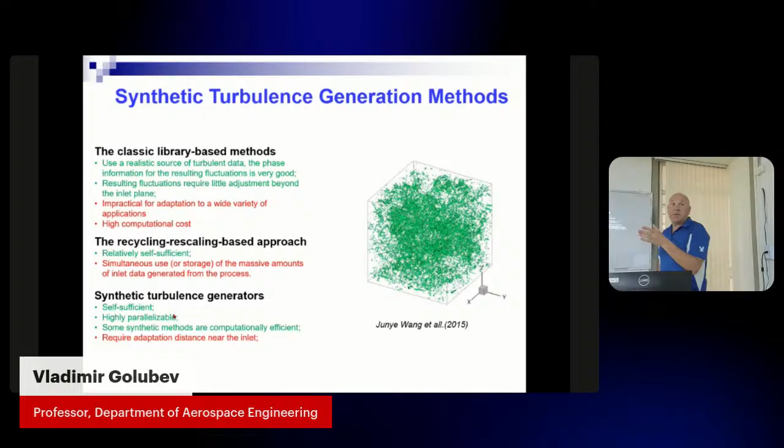You basically match your amplitudes and frequencies to something called the random flow generation process, which will match the particular spectrum of turbulence you want to match. If you find an atmosphere, you have a von Kármán spectrum for your turbulence in the cloud somewhere.

So that's what you're trying to match using this RFG procedure. So this is the methodology. This is what the turbulence theory represents in terms of the summation of all harmonics, in a complex function plane.

As you can see here, this is the turbulence, which has this intensity level, the RFG correlation tensor, the length scale, characteristic time scale, all these things. So we have to match them all. This is something which you either measure or get from some other source.

So this is your turbulence spectrum. This is von Kármán spectrum in terms of wave number, a one-dimensional spectrum of the intensity. Typically you want to create a process which will match the specific measured spectrum, could be von Kármán, Gaussian, or Liepmann. This is actually Gaussian, a simple form. There's von Kármán, but there are other ones too, depending on your specific application.

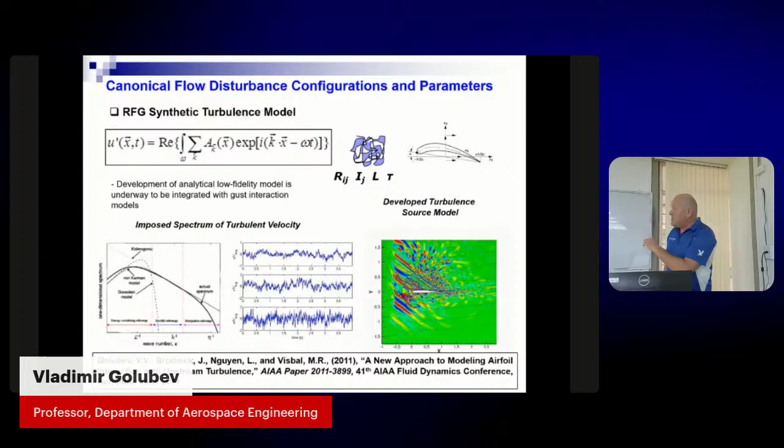So the RFG process is basically an assembly of modes in a very special manner, statistically, to match that particular spectrum. Eventually that's how it will look: some modes imposing, and a whole bunch of them start interacting. Basically you impose a bunch of modes, like gusts I was talking about before - it's not just a single mode. They have to match the spectrum of turbulence you measured upstream. That's the idea, and this is how the random flow generation model works.

It's actually a legacy from the work of Smirnov. It was very popular - now there's another bunch of guys, also Russians, I don't know, it's very popular there. In St. Petersburg they have a group, Travin and Strelets, and they also collaborate with a guy very famous from Boeing, Spalart. They usually work together, for some reason they love each other. I'm not sure how they could collaborate now - oh, Spalart I think retired now. So it's no problem, because these days it's difficult, but they used to work together.

So this guy and this guy developed independent different processes for how you do this random flow generation. This is all down here - you can see through these tensors, permutation vectors. You basically generate an intermediate randomly fluctuating velocity, constructed in this particular form. You have those permutation tensors for all these amplitudes, for the frequencies, everything else. So if you match them all together, you can match it to the spectrum which you impose.

Like, for instance, Gaussian spectrum is right there - that's the energy spectrum from Gaussian turbulence. So you can get this thing, put it in here, generate all these amplitudes and frequencies which will match it. Works like magic - it's pure math, statistical analysis, but it works. So given those scales for the turbulence, and the energy spectrum, the envelope of the energy, you can generate the necessary harmonics.

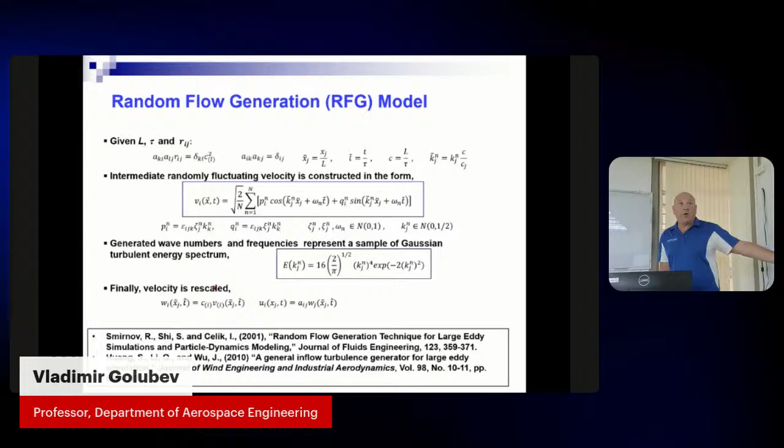That's what Maria was very careful to put all together. So you have normalized amplitude, direction of the wave number, phase, non-dimensional frequency, and then you generate wave numbers and frequency representing a sample of random turbulence energy spectrum, which is given. This Cholesky decomposition is also introduced.

The latest version of this methodology was developed by Shur, Spalart, Strelets, and Travin, three from St. Petersburg University. Spalart, of course, is the Boeing guy, very famous, Spalart-Allmaras. They all worked together to generate this methodology: turbulence generators for RANS-LES interfaces and zonal simulations. That's what was published. You can look at this reference from 2014.

It was the latest from them in the Flow, Turbulence, and Combustion journal, and there was a previous cite, kind of the same thing, by Adamian and Travin.

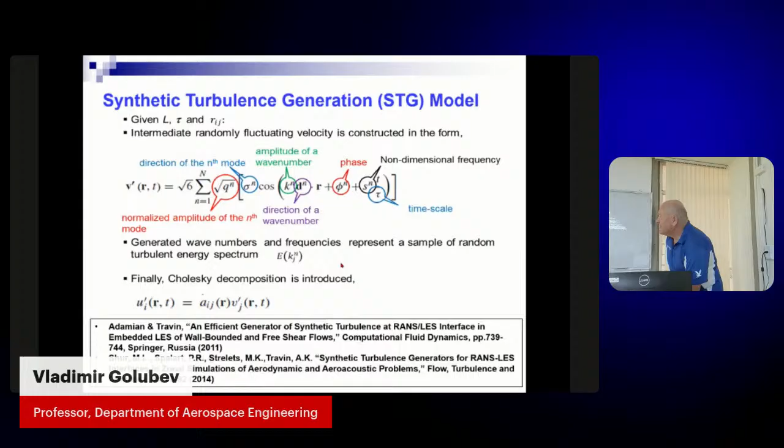Anyways, so this is the methodology, and then you have this STG procedure for how you generate the modes. Numerically it's quite complex. You have to do a lot of wave numbers uniformly distributed on the surface of a sphere, the Fourier mode direction should be orthogonal to the wave number direction. There's a lot of details. Believe me, she was suffering a lot with all those things.

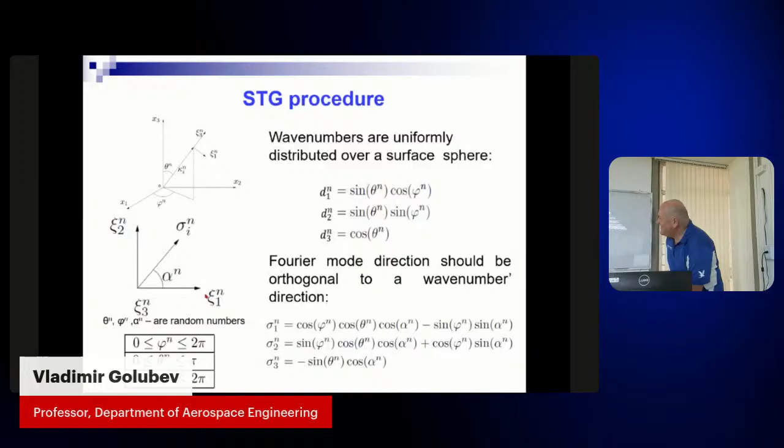She told me later, I'm not PhD material. No, but she got it, she graduated, and now works with a diesel company, Cummins in India. It's totally different there, managers, technicians, very far from everything. But she's got a baby just born, so she's got to get on with it.

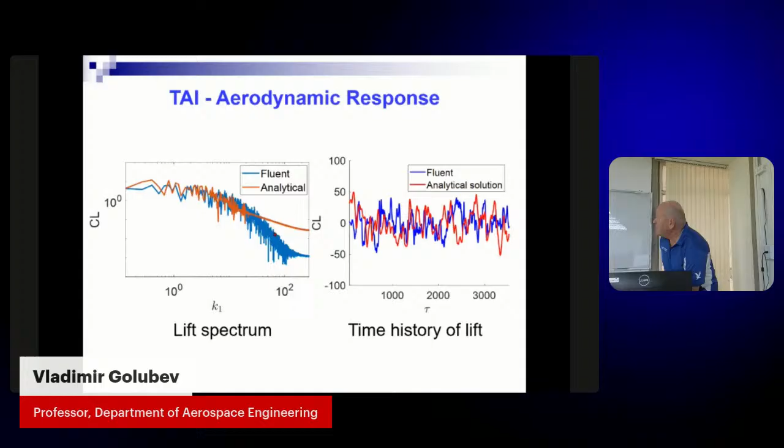So from the Fluent and analytical approach, that's what eventually gets the result. For the spectrum and time history, it was pretty good. That's what we get from all this analysis.

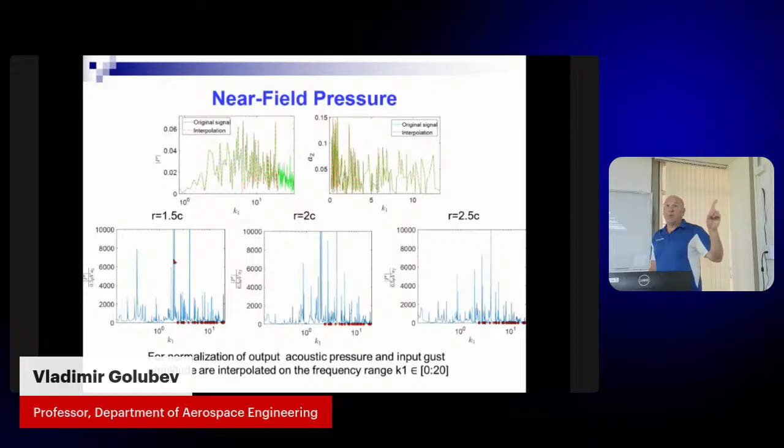So we can predict now from turbulence, based on this analysis, which modes are supercritical and which are subcritical, which actually propagate into acoustics, and we were matching these results to the spikes she measured. Indeed it was proving the point that this supercritical transition happens in turbulence. Not all modes can actually create acoustics, only the few which correspond to the spikes are the supercritical modes. So that was a very nice final result, no matter how she hated all this mathematics, but we got it.

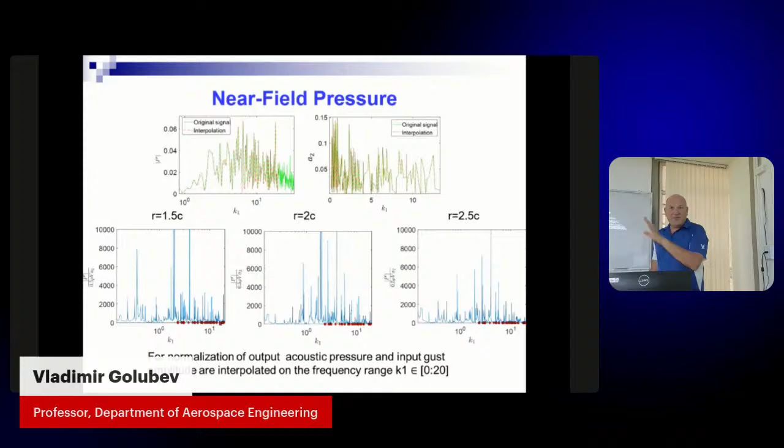Yeah, it was fun, matching the pressure again. All right, that's it. Thank you. If you have any questions, it's a bit more complicated topic today than before, but hopefully you can get through.

A lot of new knowledge. Okay, I have a question.

The pressure disturbances are generated by the interaction of the vortical disturbances with the structure. When you hit the airfoil, that's when acoustics is generated. By themselves, the vortical disturbances don't generate any acoustics or pressure. They're not supposed to, at least.

Those pressure disturbances can also transition into acoustical modes, like the first initial ones. Yeah, that's right. It's called transition, or reflection, or scattering. It's called the scattering problem, acoustic scattering problem. That means you have the vortex, the turbulence, interacting with something, and this vortical disturbance scatters into acoustic waves when it interacts with the solid, with the blade or airfoil wing, etc. So that's a scattering problem, or the leading edge problem, it's called the leading edge problem.